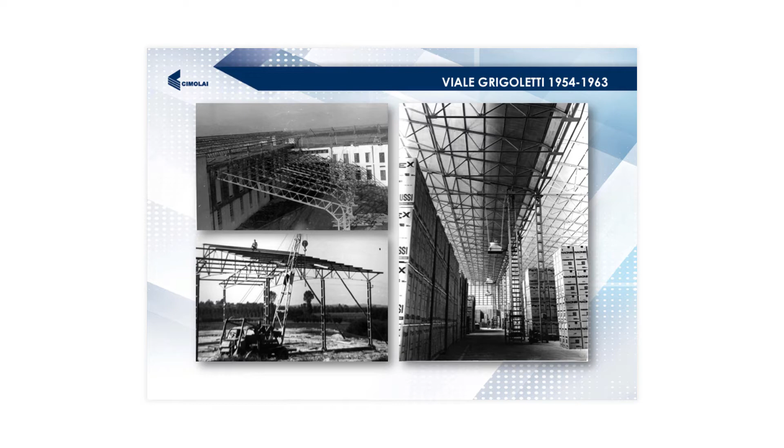And looking at this picture here, this demonstrates some of the ingenuity at that time. This vehicle we see here was actually a World War II built vehicle, a kind of armoured vehicle they used in the war. And they needed a crane - they had no money for a crane, so they just built this vehicle, converted it. It gives you an example of the kind of innovation and why the company was so successful at that time, because any problem that they had, they were able to work around it with this kind of flexible mentality, which you're famous for, I think, Italian people.

Now, we fast forward to 1963. We need to move again. This time, just up to Viale Veneto - you can see it's a much, much bigger place, 23,000 metres squared.

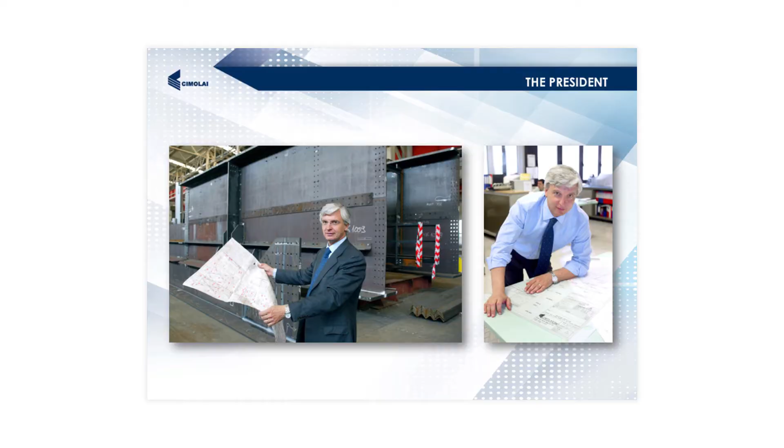We look back to Mr. Armando. He and his wife are still with us. He celebrated his 90th birthday last week, and they're still a part of the company. But I can't finish the presentation without speaking about our current president, Armando's son Luigi, because the impact he has had on the company can't be overestimated. He's really been an essential part since 1976 when he got his degree and started, and especially since 2006 when he's been working with us as our company president.

When you consider Armando, his father, he had the determination, the courage to start this company. It's really Mr. Cimolai Luigi who's had the tenacity not just to continue it, but to really expand it and get it to grow. So with Mr. Cimolai, we're in good hands.

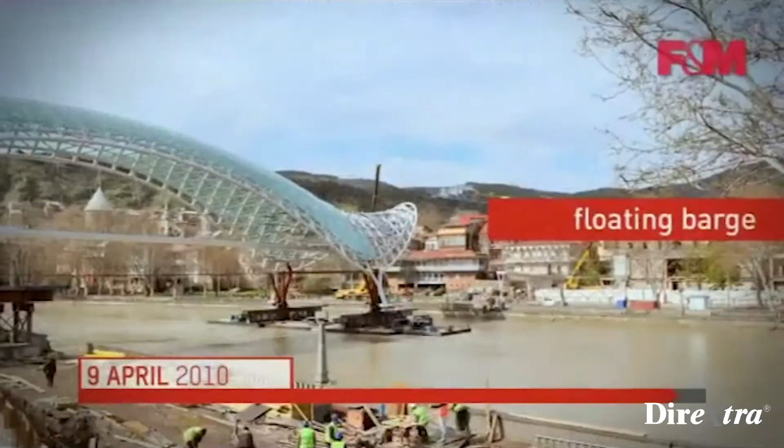That was the first project we did in the US, back in 2010, in Dallas—this is a Calatrava bridge. This opened our market in the US. After that project, we had several opportunities, which I'll walk you through later, but for us this is an iconic bridge. As Daniel mentioned earlier when going through the history of the company, 27% of our production is now in the US.

Another big portion of our production and our know-how are the stadiums.

So we did, I don't want to say the most famous stadium in the world, but we are pretty close. Two major steps we did in our development of the company. One was with the Millennium Stadium, after the shelters Daniel was mentioning. Millennium Stadium was a huge project with huge time constraints, where basically the whole company focused on that specific project to make it happen, because it's not easy when you move abroad to be organized in such a way that the client is happy.

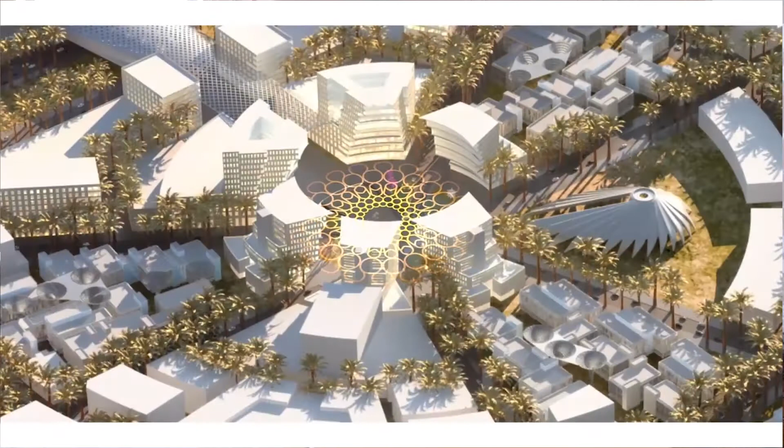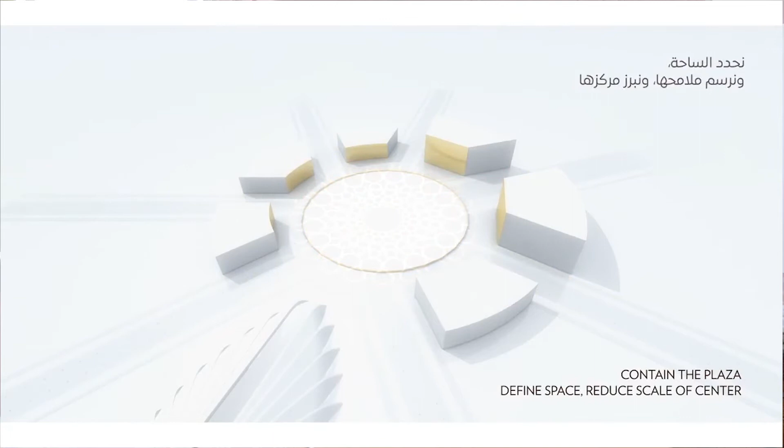So okay, this was the master plan, how they developed the idea. I think this was given by the client, right? This video was provided by the client.

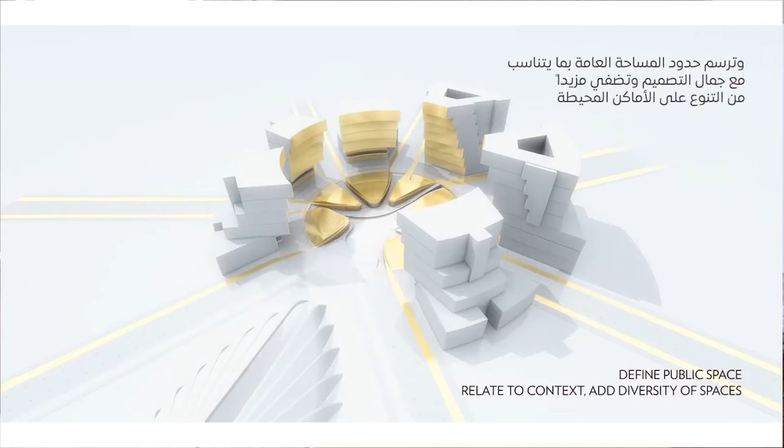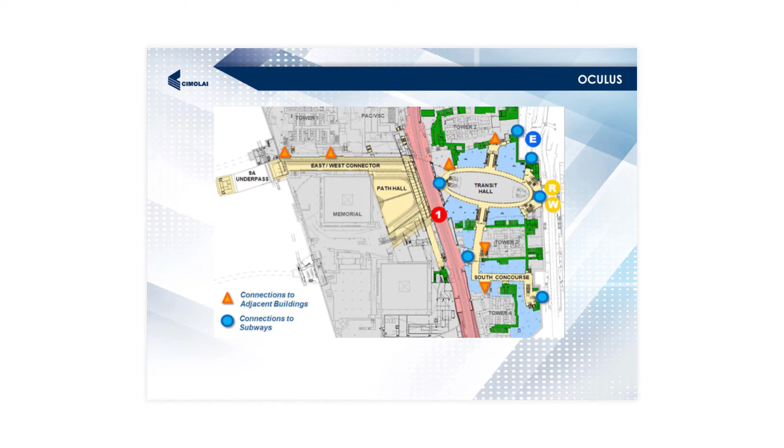This is downtown Manhattan. We did 3 major projects in Midtown and one big one in downtown Manhattan. So this is the project I was mentioning before. This is the hub station at downtown, exactly where the Twin Towers fell down. This is where basically the trains that come from New Jersey connect to the New York City train hub.

There's another one, Grand Central Station, that is slightly bigger than this one, but let's say that's an old station, this is a new one, so there's a bit of competition between the two. This serves something like 200,000 people per day.

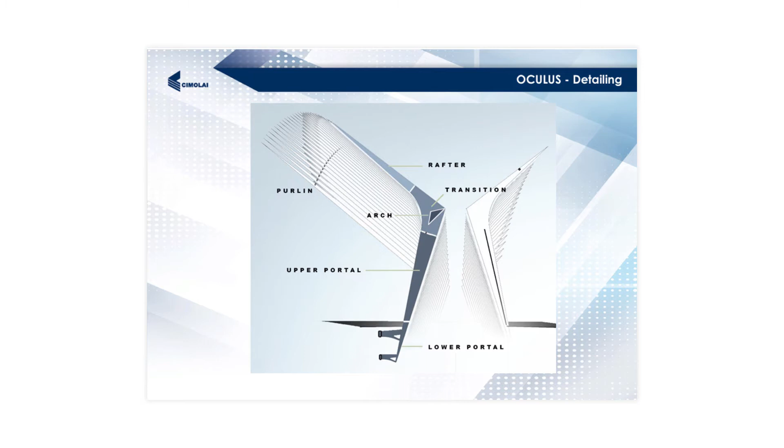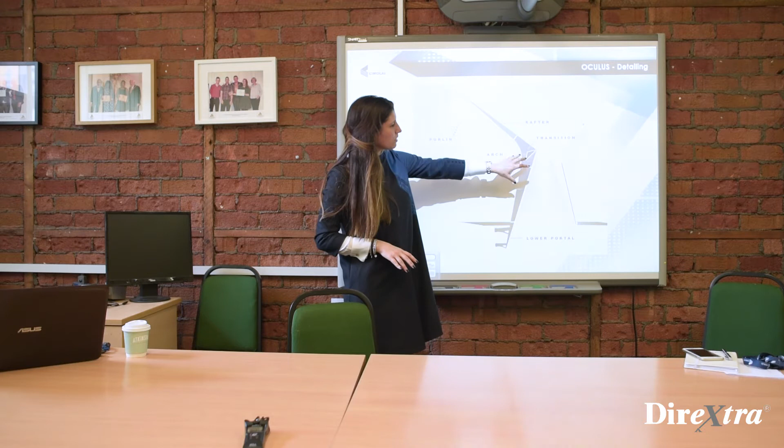This is a section. So what to do? We decided to divide what we call the lower portal from the upper portal, which basically connects the lower with the arch. The arch has this transition element that is a kind of huge sandwich connecting the upper to the rafter. So these are the main elements: lower, upper, transition, plus arch. These two pieces were welded together in our shop, and the rafters.

And now I want to speak about the other 2 projects. The first one, both of them are one beside the other, so that's an amazing thing, the fact that 2 very challenging projects are right next to each other. Both are in this area, Midtown Manhattan, that will be in the middle of the square surrounded by this new skyscraper they are building right now. You see, 46 meters high.

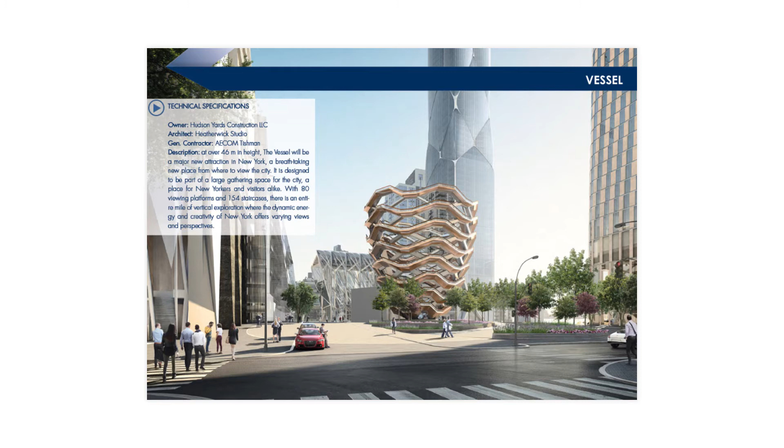I think there are 154 staircases. So this is how it will be. The vessel, which is the name we give to the tiny stuff, is down here. You don't see it here, but it's something like that size compared with the rest. So this is the full development, the render of how the area will look like.

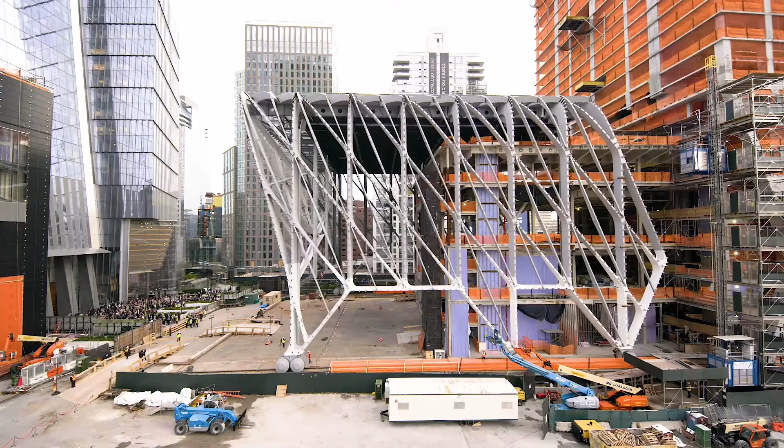Here you have, let's say, a fixed building and a movable one, one on top of the other. These are the wheels. The wheels are 2 meters 10.

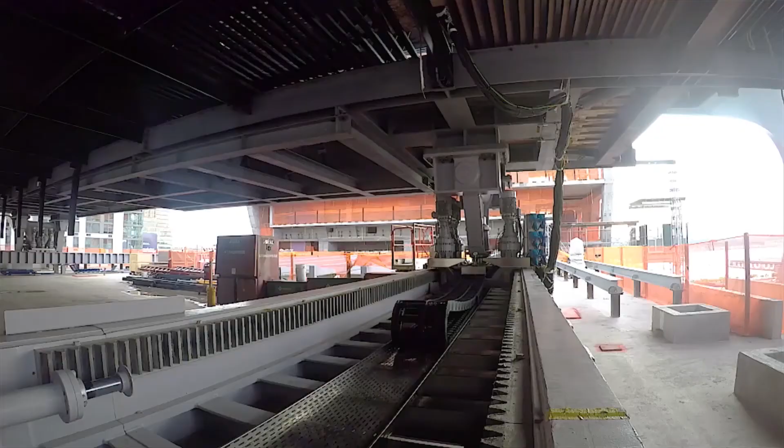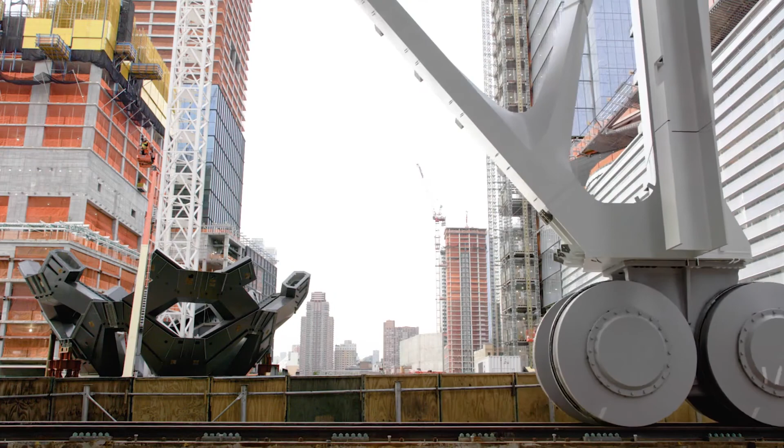So that was the try we did on May 6 here. That takes 3 minutes to move. This is a time lapse, but in reality it takes 3 minutes, so it's a very quick one. So this is how it works.

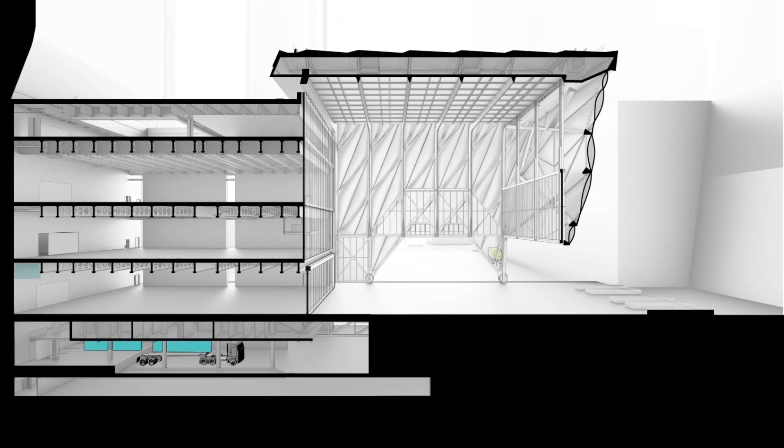So to exploit the space they have just in front, they made a performance, an event building. This is what they invented, basically. You see, we have movable doors that are under erection at this moment. They will have the ability to switch and change the destination of the building as needed. I think that's my last slide. So that's it.